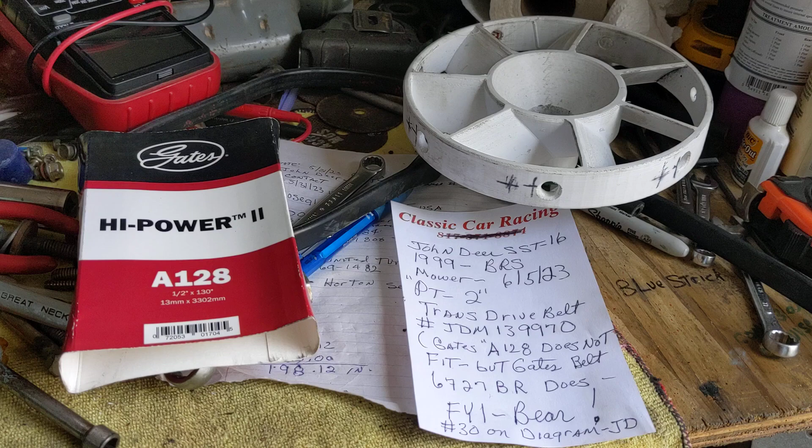It's going to be part 2 on the John Deere SST-16 at Bear's Rod Shop, owned probably now going on 5 years.

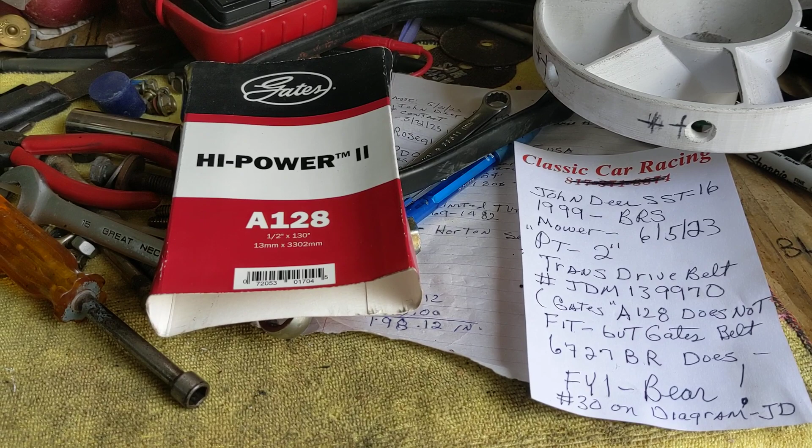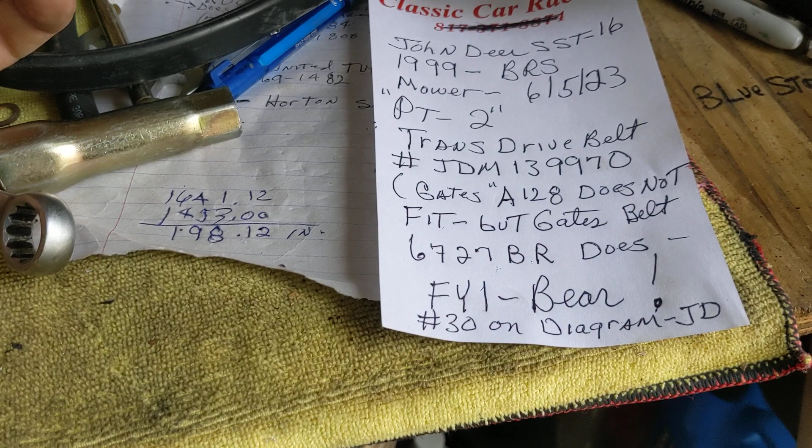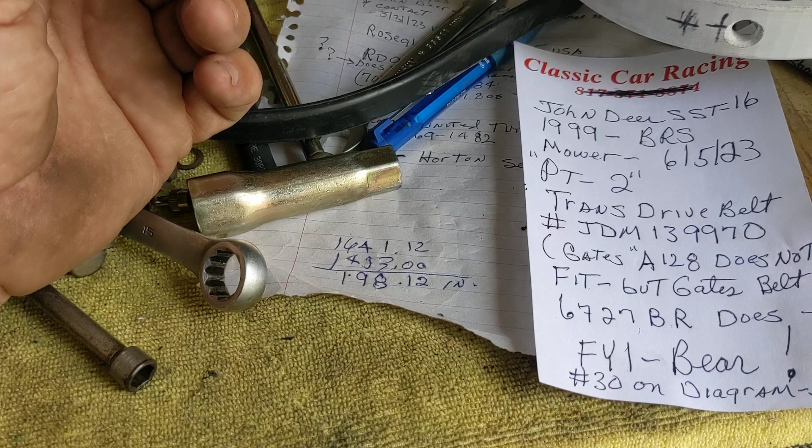I'm showing these belts today for a reason. I took off the original drive belt, which the part number would have been for John Deere JDM139970, and a Gates belt crosses with a 6727 BR, Boy Robert. I put on this belt here. It was a good match down there at my auto supply house, but it's only a half by 130 inch, or 13 millimeter by 3302 millimeter, and the pitch is wrong.

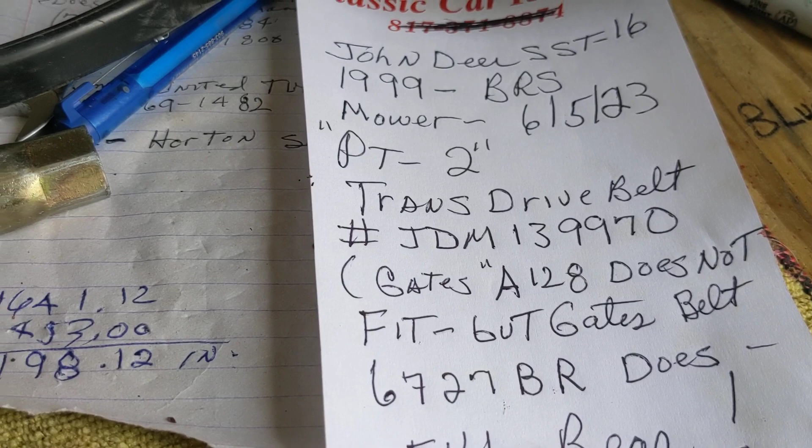The pitch on the A128 is like 30, and the one on the John Deere belt, that number I just gave you, 139970, or the SKU number, you could just use M139970, has about a 39-degree pitch.

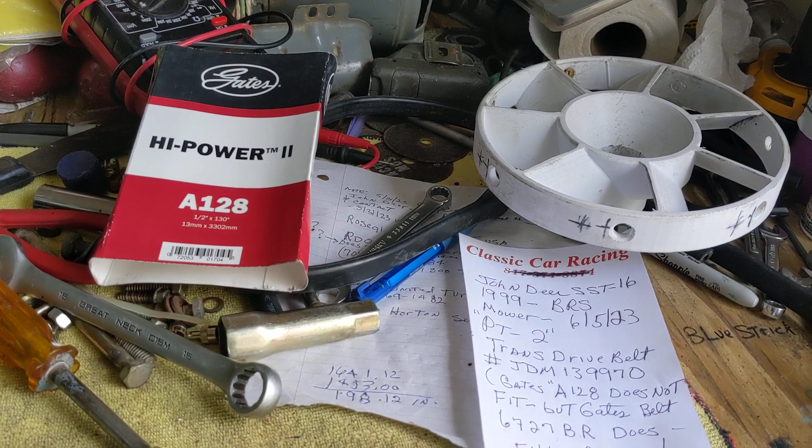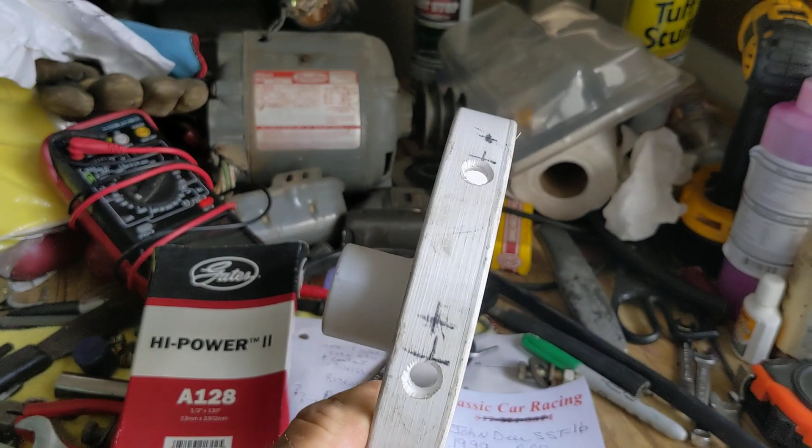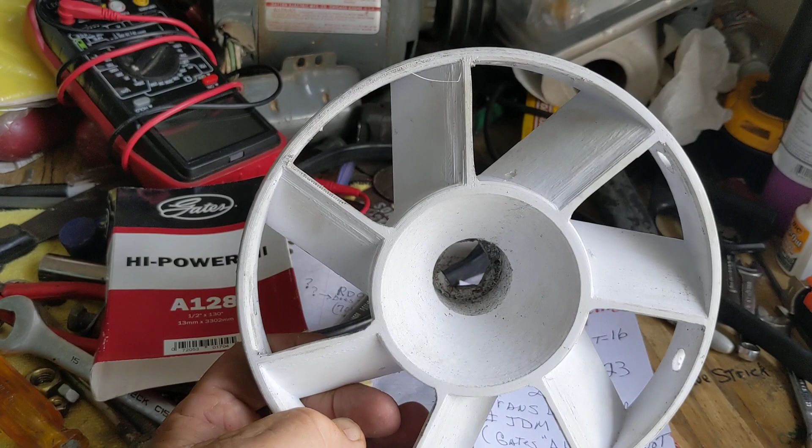So the saga continues. While we're sitting here, I'm going to put that fan back on showing operating, but I had to remove it too. I've got to remove that A128 belt, which is a booger. Anybody that owns one has got to love them or hate them, because they are a booger to put that belt on. But here's the 3D printed one, and I went ahead and drilled some venturis around this outer band that will let that air sling out of that band. John Deere puts a real flimsy plastic fan on, and this one here is 3D printed solid.

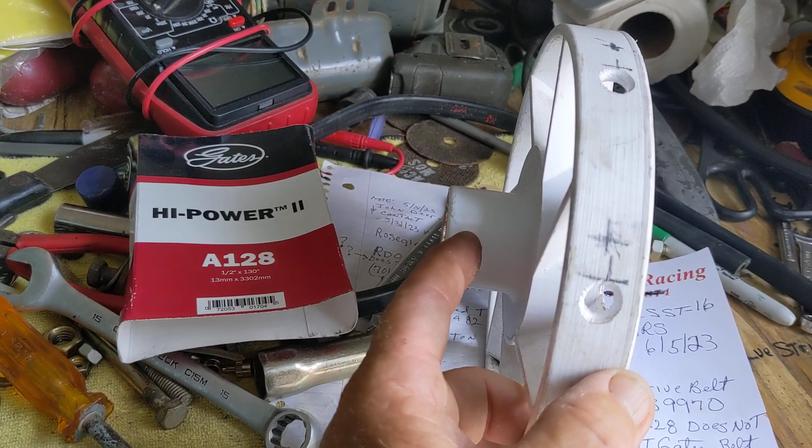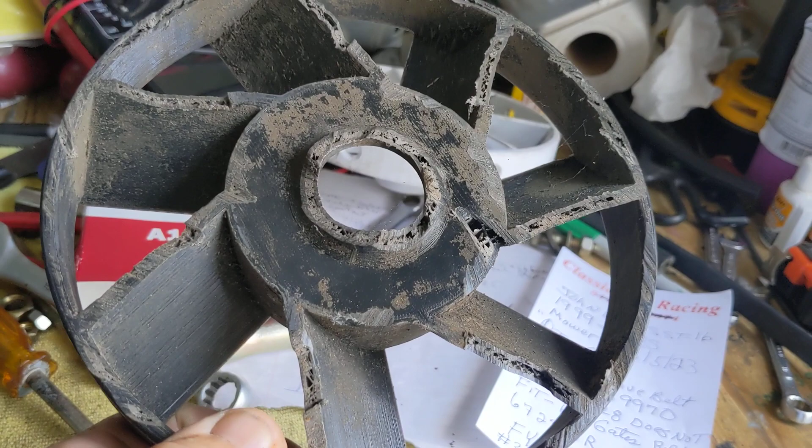Again, I'm going to show this because the videos have been kind of chopped up. This is the one that lasted 4 years, but you can see that actuator rod just gnawed away, and you know, I never did, because the motor's so loud, never did hear it, but lo and behold, this thing was destroyed, not only by the actuator rod, but by debris.

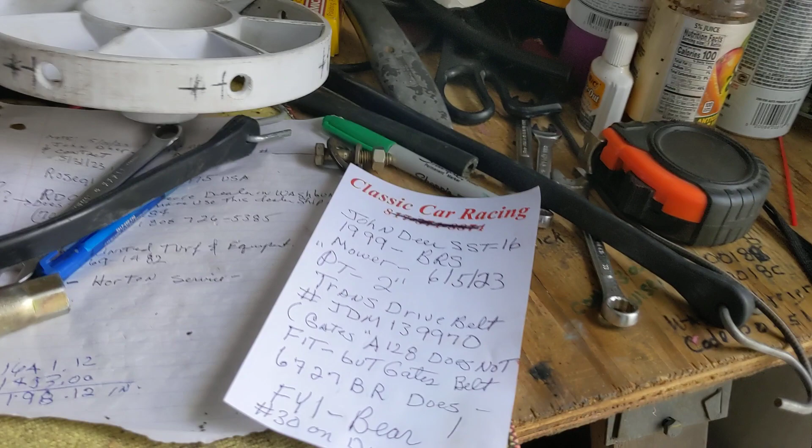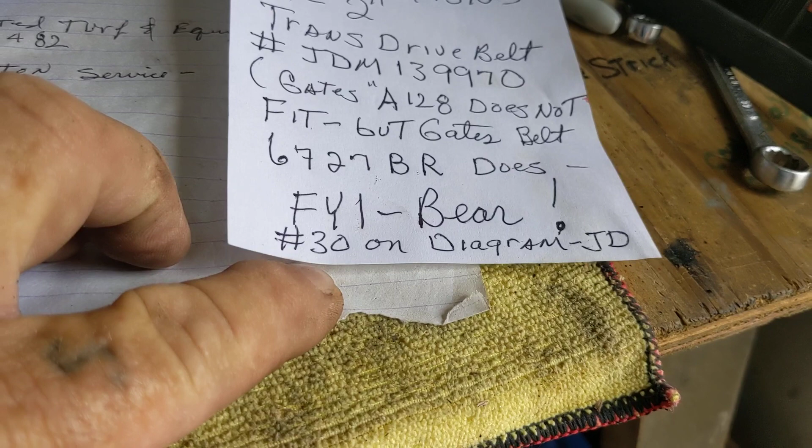All right, let's reiterate these here. Like I say, if you go on to the John Deere diagrams, images, this belt for the drive to the transmission is 131 5/8, not 130.

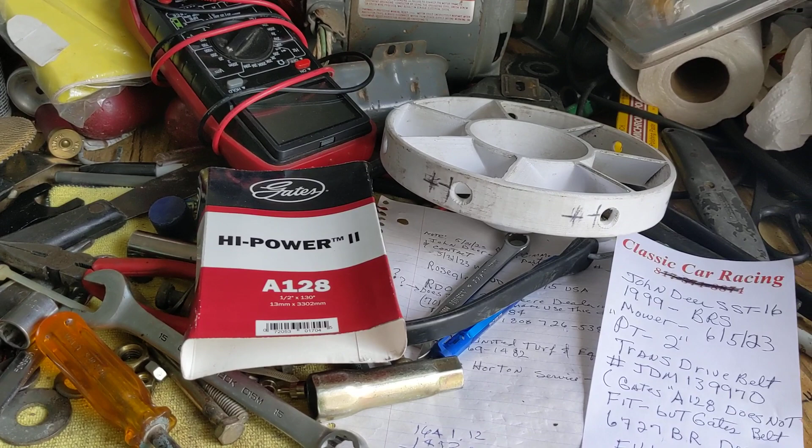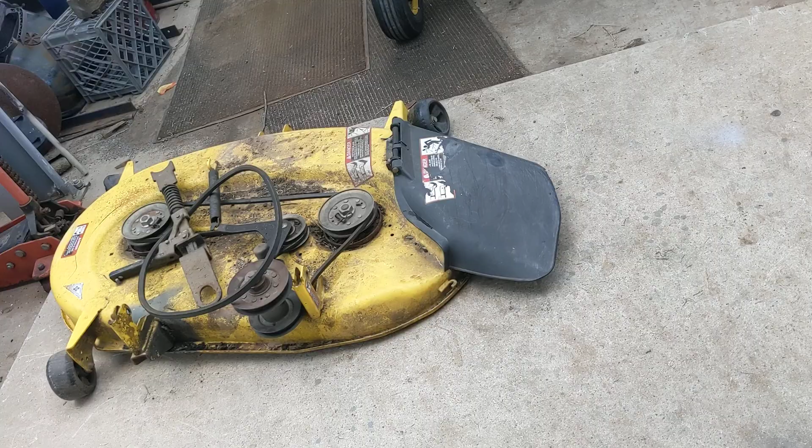Let's take a little walk here for part 2. While I had the deck off, I didn't notice it until this morning. Let's get that belt out of the way.

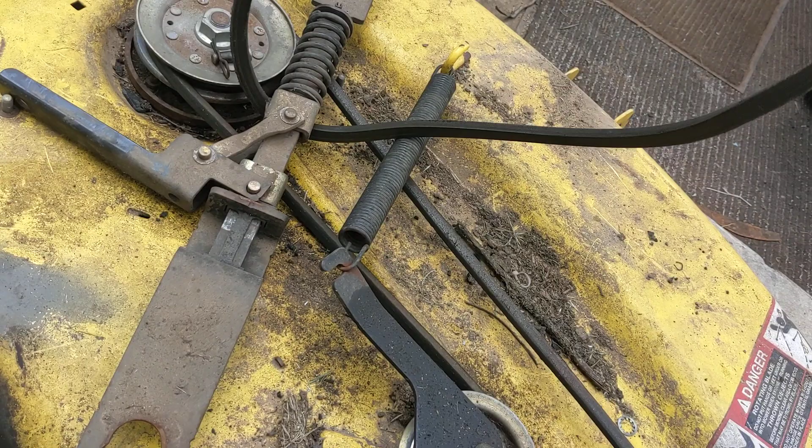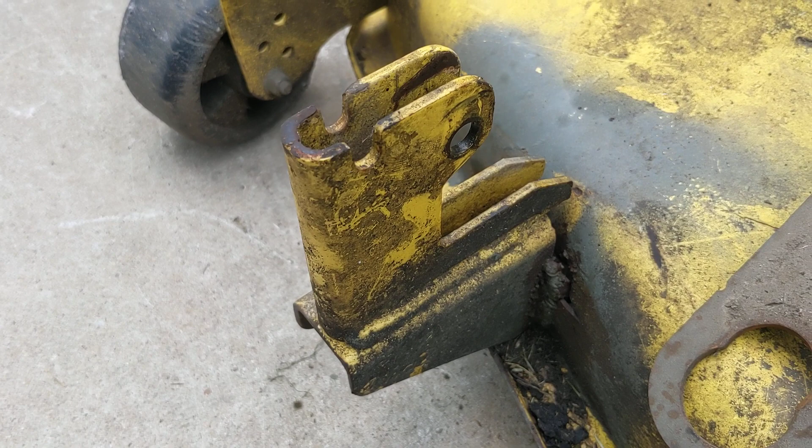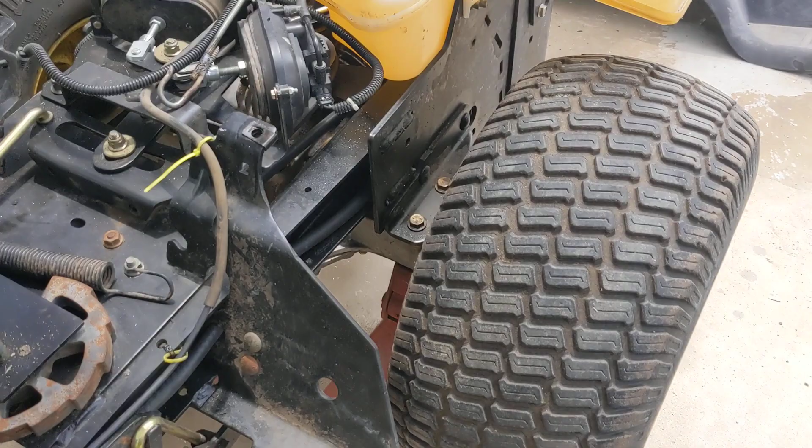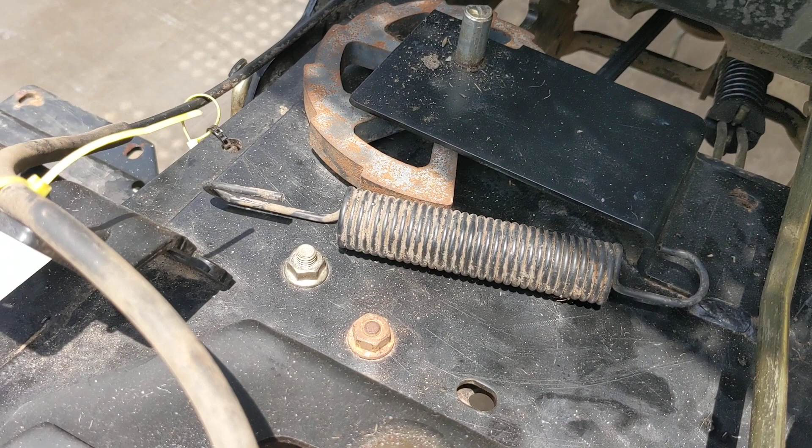Let's go out here a minute and show you an old trick. Terrell Fix-All is my buddy I watch on lawn mowers, and then I get a lot from Jack Collins, one of my regular subscribers and viewers. Jack has been very good help there in Ohio. He doesn't have a website or anything, but that spring right there hooks onto that idler pulley underneath.

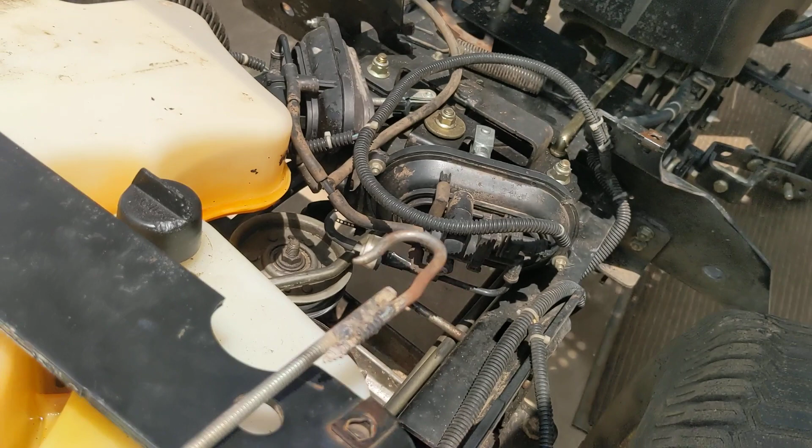To pull that thing by yourself, you're gonna need to make you a hook. If you go on to Terrell's Fix-All on a zero steer technology, which is ZTR, you're gonna need to make you a hook because there's no way you can pull it. So what I did is I removed that bracket.

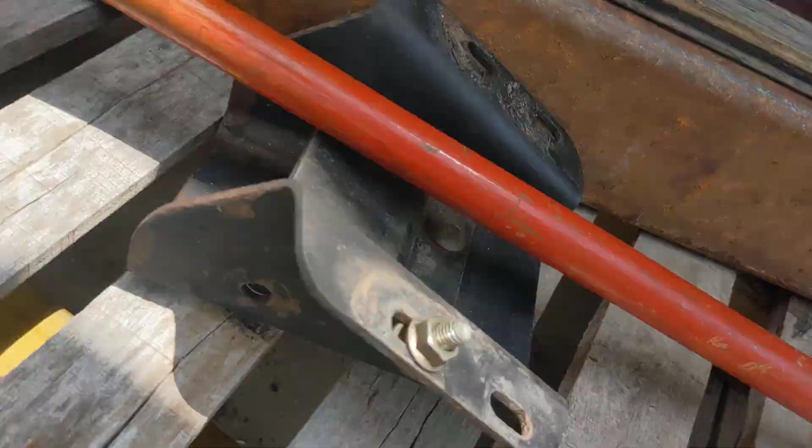We can move the broom out of the way. This bracket is the one that held on to the 3-bag deal, which I don't bag my grass. Man, it's a pain with all the stickers. So I took me one of my deals off of my machine mill back there, and then I can run this through.

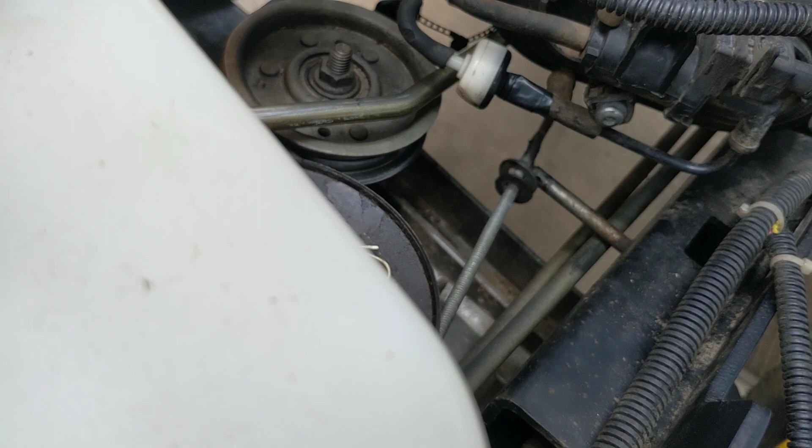Doing one-handed here. Well, I'm not gonna fight it, putting it through, but it goes through there. And then you can hook down here, and you can hook that spring, and then be able to pull that spring with 2 nuts with a piece of small 1/4-inch all thread. Make you a hook, because it's gonna make life a lot simpler.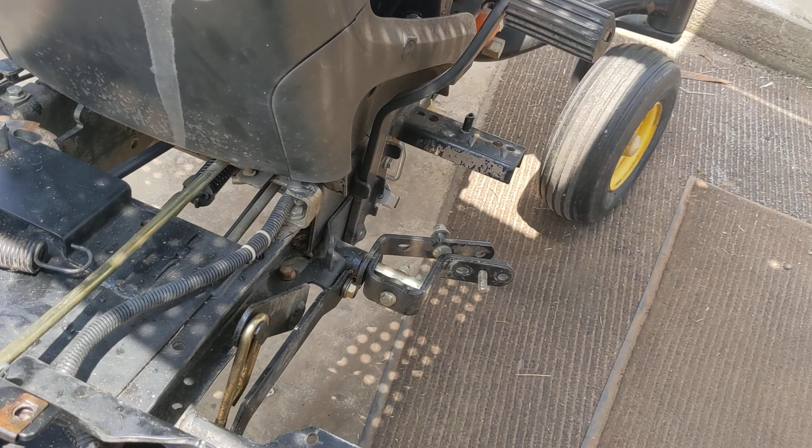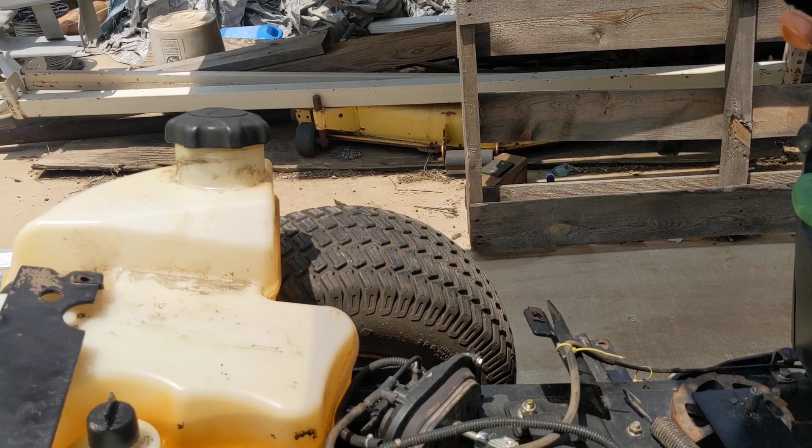So we may even go into a part 3 on this thing, but the mower deck needed some attention as well. And while I've got it, I'm gonna flip the thing over, check them blades good. Might as well, but we need that thing going. And the Troy-Bilt had to go back to a friend of mine that I bought from, Mr. Pepper. He's gonna check out that belt because sometimes it won't disengage.

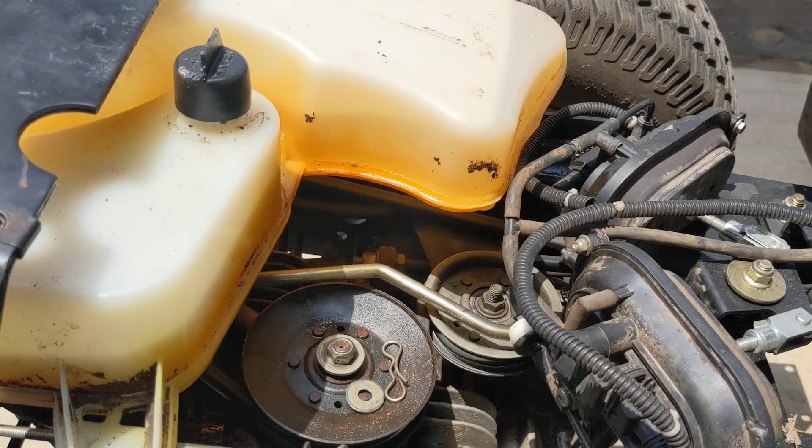So the Troy-Bilt is no longer here in this video. It's over at his shop, and I know he'll tell me what he finds on it. But you guys gotta love or hate these spin steer technology older mowers. This is 99, been a diehard.

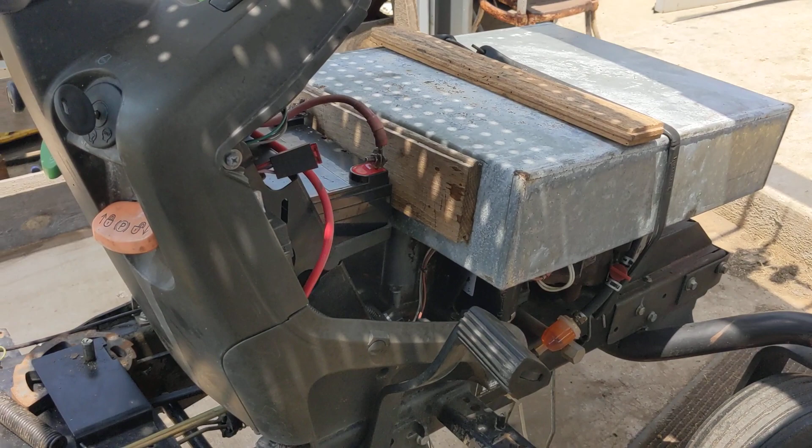And let's pick back up with part 3. We get the new belt on. Let's show this thing running and steering like it ought to. Bear's Rod Shop will be out of here for June the 6th. And boy, the heat cranking up and maybe some rain. We need it bad, but this will be into part 2, and then we'll finish up.

Hope this helps somebody that has one of these older ones. There's a lot of videos on YouTube and the creators out there, and don't let them get real dirty like I did down in here. It was a shame how much debris over a couple of years that got collected. The new fan's going to really help, and we're going to do more TLC maintenance every fall when it goes down. We're out of here. We'll see you on part 3.